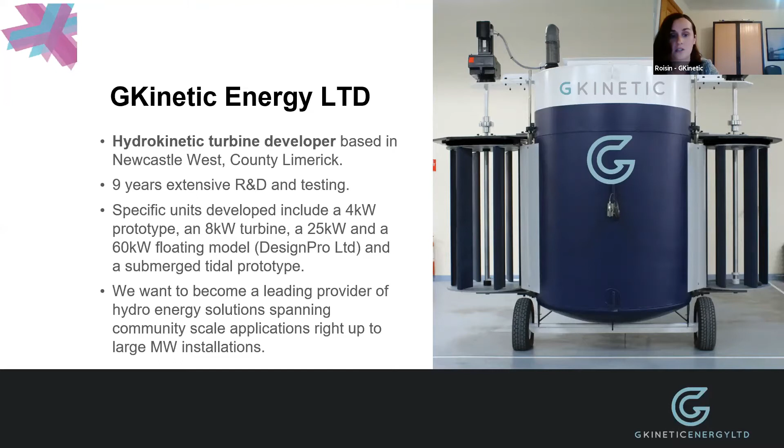So we want to become a leading provider of hydro energy solutions that are really innovative for unique scenarios, and the CityxChange project is a great example of that. Basically, I'm trying to keep you awake because it's a Wednesday evening, so I'm trying to be witty.

But it really did all start with a boy—not in the usual sense, a nautical buoy. So Vincent was out on the water, and he was trying to tie up to a mooring buoy, and the tide was so strong that the whole buoy was nearly completely submerged. And he started to just watch how the water was actually behaving, and started doing a bit of research into it.

And the whole concept behind GKinetic is that you're accelerating the flow of water due to an obstacle, and you place turbines either side of that obstacle where the flow has been accelerated, and therefore you get more power out of it. So that's it in a nutshell.

So it involves 2 vertical axis turbines, and they're placed either side of this obstacle, or what we have coined as a bluff body. We have built out a significant patent portfolio on that, and I'm very pleased to say that we've got patents granted all over the world now on the bluff body concept.

So the key things that it does: obviously it increases the speed of water into the turbine, so therefore you get more energy and you can harness more power. But a big thing for it is that it makes the turbines viable in low flow speeds. And that's really important because we get loads of unsolicited inquiries all the time for our turbines, and it's usually in sites where the flow speed is lower.

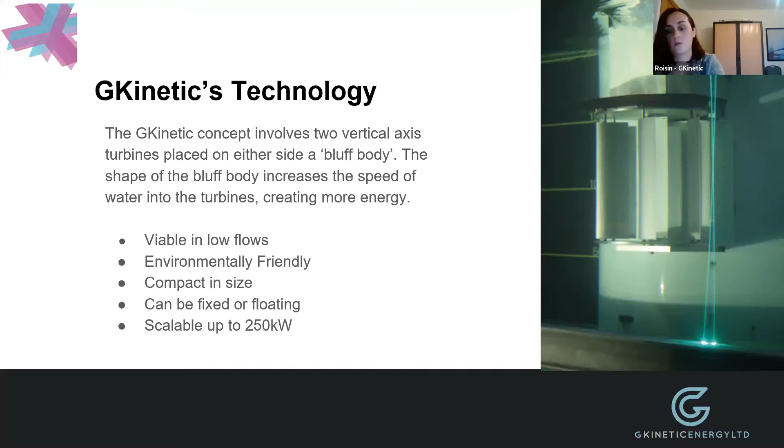So this is just a video, I hope it's playing properly. But this is the crux of the concept again. You can see it nicely there, going from a drawing into the real life scenario. You've got the bluff body in the middle, two vertical axis turbines either side, and the water hits the front of the bluff body, and the accelerated flow is then captured by those two turbines either side.

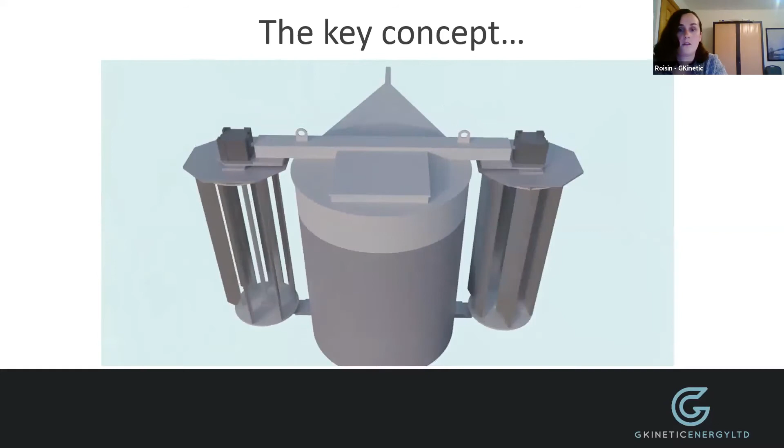I'm not going to bring you through the last 9 years, but it's been a long road. We've got an awful lot of people we could thank along the way, but these types of devices are called deep tech, or deep technology. It requires years and years of very capital intensive work. This type of innovative solution doesn't just happen in a year or two. So in a way it's challenging, because lots of funds out there are for startups, mobile apps or retail products, and we're really in a realm of our own where this has taken a number of years to get to where we are.

I won't go further into the team, but if you have questions about the background of the company, you can flag them up afterwards.

One project I do want to draw attention to, one that we're really proud of, is we did testing in the Limerick docks in 2015. Anyone familiar with the city, that's where Shannon Foynes Port Company have their main wet dock. It's 440 meters in length, and it's actually just the perfect testing environment for devices like ours. We had done a bit of lab testing in 2014 that had gone really well, and we were looking for the next step up. We didn't really want to be in a lab anymore, we wanted something more like the real environment.

We were funded by SEAI, the Sustainable Energy Authority of Ireland, for that, and they have been fantastic supporters of GKinetic pretty much from the get-go. The other thing that allowed us to do is employ a couple of people. This is a very niche area of renewable energy, and it's fantastic to be able to facilitate people who are keen to get into that line of work. We also had a PhD student who did his whole thesis and PhD around the project in the Limerick docks.

Just reiterating the fact that hydro in many shapes and forms is all over the world, and people are looking to these solutions. So, a case study you might have heard about: in 2018, Falls Hotel and Spa in Ennistymon in County Clare became the first hotel to run on hydroelectric power. They got phenomenal press out of it, it was a really good news story. When the river there is in full flow, their hotel is 100% powered by the river outside their window. It just goes to show that this is very doable.

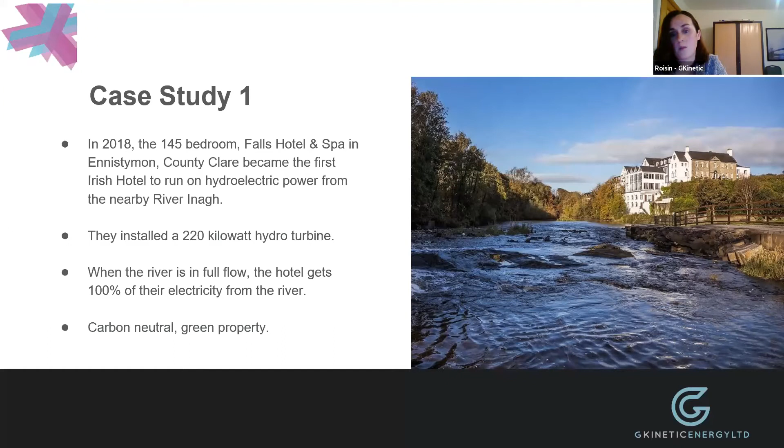While that would have been more traditional hydroelectric power, like what Aoife was talking about, other newer solutions that are adapting to smaller scale deployments are happening all over the world as well.

An example would be ORPC, based in the US, who have a fantastic project in Alaska that's been years in the making, and they've just secured a 10-year license to continue with their device there. Their device is quite different to ours—it's submerged, sitting on the bottom of the river, and quite large, so you'd need a much larger river to deploy it. Now the community, who was 100% reliant on diesel generators before this project, only uses diesel as emergency backup power, with the rest of their main power coming from the river.

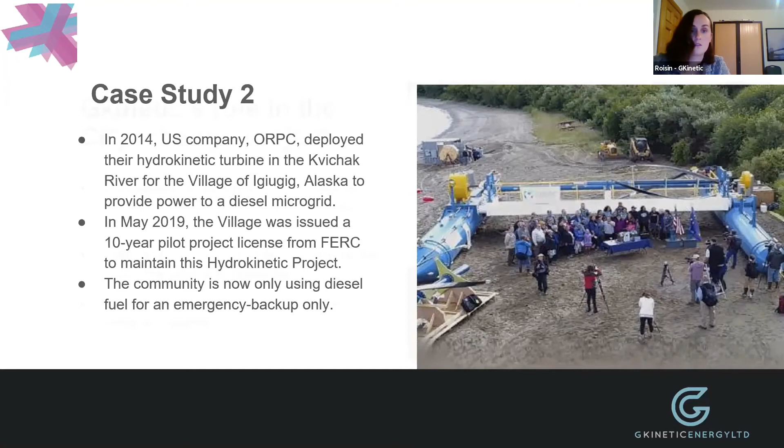I suppose talk a bit more specifically then about how GKinetic got involved in CityxChange.

We joined as one of 32 consortium partners, and we were asked to join the project specifically for the role of assessing the potential of renewable energy production from watercourses in the city. That was step one—carrying out feasibility studies, hydrology studies, and a staged process, making sure first that it's feasible and that there's a suitable site to do this in, then branching out into hydrology studies.

We're really at that stage now, which is why this event has come at a good time, because now we're looking to implement a deployment. What we're proposing first is a singular demonstration of just two turbines, and provided that goes well, we'd install subsequent turbines after that. We're starting to look at planning, permitting, turbine design, build, installation, and we're really keen to talk to all the various stakeholders to get any ideas or concerns, because this project will rely on the support of all the stakeholders and the local people around it.

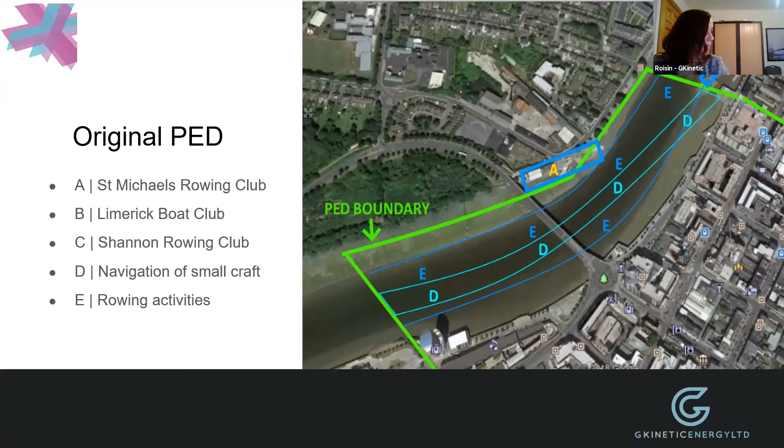For a number of reasons, GKinetic decided it wasn't really feasible to put in enough turbines to get the power we needed from this project. So we started to look further afield, and the site at Thomond Weir has emerged as by far the best and most suitable site, for reasons including flow characteristics and fewer people passing through it for safety reasons. What that meant was the PED was revised—it's still the original PED you can see in the square, but it's now been extended to include Thomond Weir.

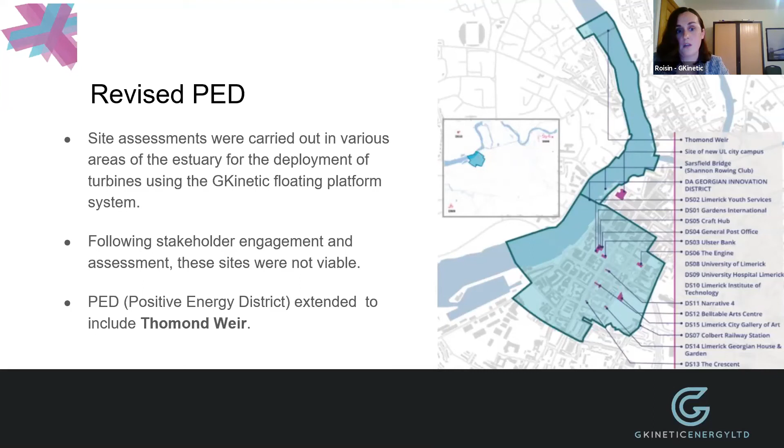The Thomond Weir itself—I might pass over to Vincent at this stage, because as it gets more technical he's definitely better. Not sure how familiar each of you are with Thomond Weir, so we won't go into too much detail.

Thomond Weir is an old ESB installation that was put there for catching salmon long ago, and it's pretty much unused at the moment, but there's quite a bit of interest now from Limerick City and County Council and local stakeholders to see what can be done with the structure. The timing is good because we're arriving at the same time. In terms of structure, it's very suitable for installation of turbines, particularly our type. We've done a survey and the first phase of hydrology studies, which indicate we can get decent flow speeds through it, sufficient to generate power. The next stage would be a second phase hydrology study, which will predict what happens when we put one turbine in.

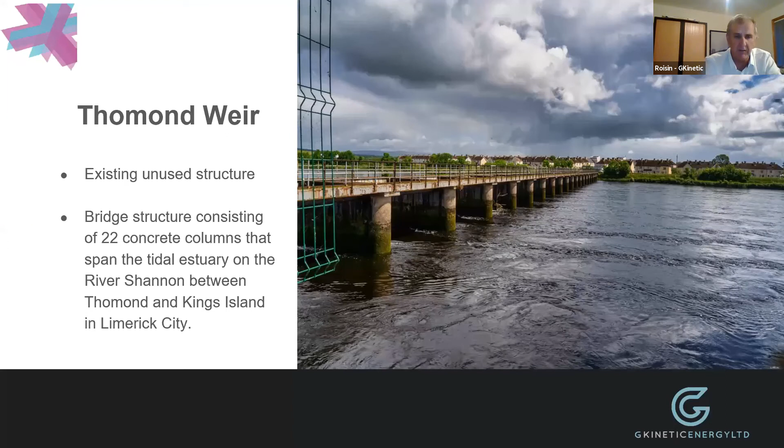And what we want to do is put one machine in with zero risk of flooding or any interference to anybody else, and do an assessment of one turbine in a de-risked scenario. The hydrology model will try to predict what will happen with that one turbine, and based on the accuracy of the model, we can compare that data to the actual data from installing one turbine. That will inform us on what the effects of installing 6 turbines will be. It's a safe way of approaching the project, instead of trying to put everything in one go and get funding for everything. This is a much more de-risked approach for us.

Just a bit more on the technology. The first thing Roisin showed you was a free floating type device with turbines mounted to the side. But we actually get the same effect by controlling the flow through some of the openings, so it's diverted through one opening. Controlling the flow through 2 openings to divert the flow into one gives the same effect of accelerating the flow through the turbines. The turbines themselves are designed to operate up against the wall, so we'd expect very good efficiencies from this.

We've already done tank testing in a flume of a very similar type installation.

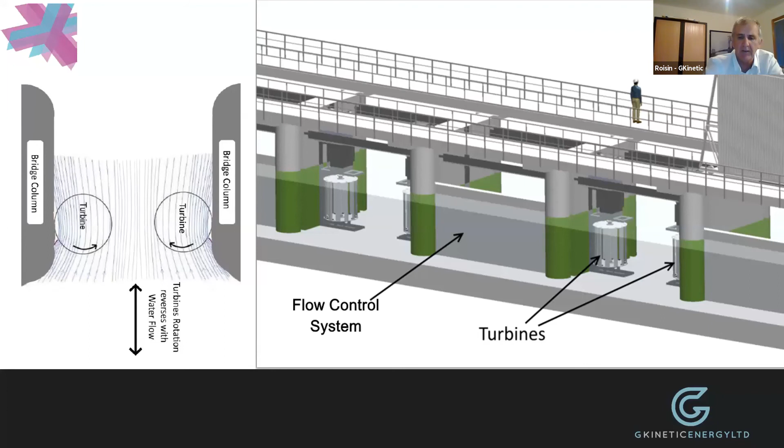This gives you an idea of the scale of the turbine. You can see a little man on top of the weir itself, and those are the weirs, the weir openings along there and the weir piers. So this would be the single installation: a pair of turbines and some flow control measures in adjacent openings, and that would be determined by the hydrology study.

Environmental considerations are something we're very conscious of as well. At the moment we have a machine in Bordeaux, France, in the River Garonne. We've done measurements of noise emissions, measurements of power, and measurements of flow, how the flow behaves around the machines. So far so good, there's nothing really sticking out that's a problem.

Turbines rotate very slowly. What's called the tip speed ratio basically describes how fast the blades are turning compared to the water flow around it. The blades in our machine turn at pretty much the same speed as the water flowing past it. That's very different to a horizontal axis turbine, like a wind turbine, where you see that blade whopping by. Ours rotate around, and as they go around, they're only traveling at the same speed as the water. Those types of things have been blockers for turbines in terms of environmental impact, and this is one of the key benefits of our technology.

The other thing is there's no gearboxes under the water, there's no seals under the water, there's no oil under the water. We've got some specialized bearings that are the only moving part down there, so there's no risk of pollution there.

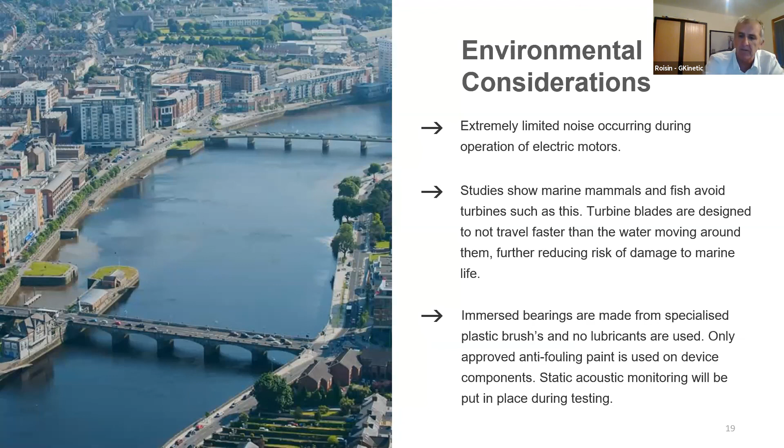CityX is very exciting for a number of reasons. Our prototype demonstration is just our first phase. The next phase would be to engage with the local community to set up a community enterprise that will run a renewable energy company. That's part of the CityX deliverables. GKinetic will just be a supplier into that enterprise. In other words, we're not installing turbines and making money off them for the next 20 years. We just want to demonstrate our machine and get an order out of it, great.

But the main reason we want to be in Limerick is it's right on our doorstep. It couldn't be a better demonstrator area for us. We intend to bring people from all over the world to see what we're doing in Limerick. In terms of money making, it's not a money making project for us, but by far the more benefit we're going to get from this is the PR. Outside of installing the turbines, the other work that's gone on in CityX is almost the setting up of new structures that decentralize power generation and who's benefiting from power generation. These are other benefits that are going to happen within the project.